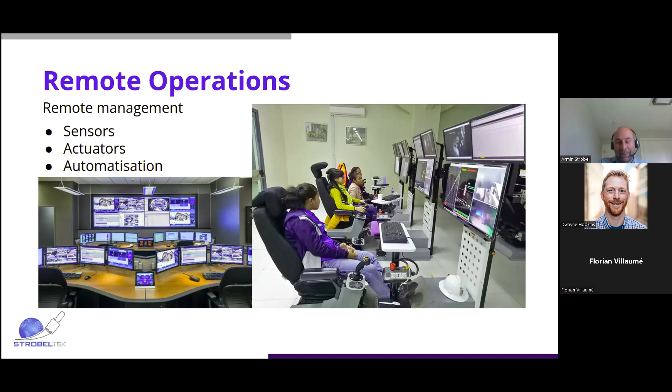So there's a wide bandwidth where you can manually control. What you see on the right or on the left side of the picture is what the remote management system could look like, where nobody's actually sitting there. They just get alerts on their phones when they need to be available.

Similarly, there are different sensors and actuators, as I was mentioning before, and there is a lot of diversity. What you're probably used to is the stationary sensors: valve position sensors, pressure sensors, temperature sensors. They're mounted, fixed at a location, and you possibly have a remote management operation center where those values are shown. And you also have, for sure, some automatization in the background, which keeps some temperatures in a certain range, and operates that.

It gets really interesting once you get sensors which are mounted on or part of mobile robots. They can be land-based robots, like what you see on top, the Spot robot walking from Boston Dynamics, or our system, or ROVs, or other autonomous underwater vehicles. The advantage of those is that they can provide sensor information from different locations, which in some cases already creates a 3D point cloud or distributed values.

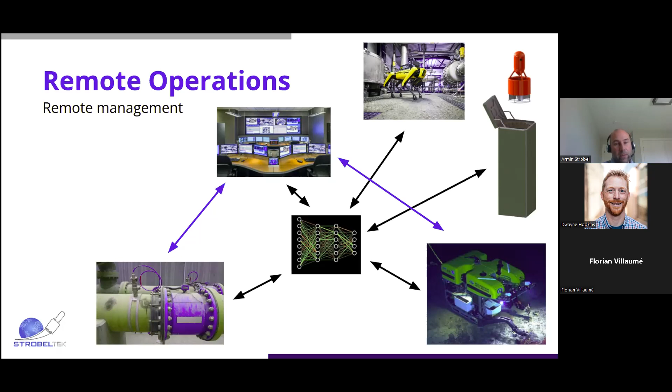And with that, in many cases, we can get a lot more information than from a sensor on a specific spot. It's similar to a camera where you get every pixel, but if you move a camera around, you can create a really complex 3D model with photogrammetry, for example, or with a laser scanner, you can also create a 3D point cloud.

So remote operations, what is the motivation behind it? Yes, I mean, we always want to improve processes, and our lives in general. And remote operations is the same thing. We're creating better awareness of the status of possibly an oil rig, or other objectives in general. I'm trying to put it into an oil rig example, but once you know better what's going on, what the status of your entity is, then you can plan much better.

That also means you possibly have less downtime, because you can coordinate maintenance actions, because you know, okay, I have to take care of those rusty spots within that time frame. While I have to shut down, I can also do other things at the same time, which you might otherwise have done sequentially. You do it at the same time because you know all that in advance,

and the whole thing also gets safer. Not just because you have fewer people, but also because you have better awareness. And fewer people means, in that case, you need to put fewer people on the oil rig, which is not just a safety advantage, it's also saving you lots of money, because those people need to be trained to be on that rig, and need to be transported.

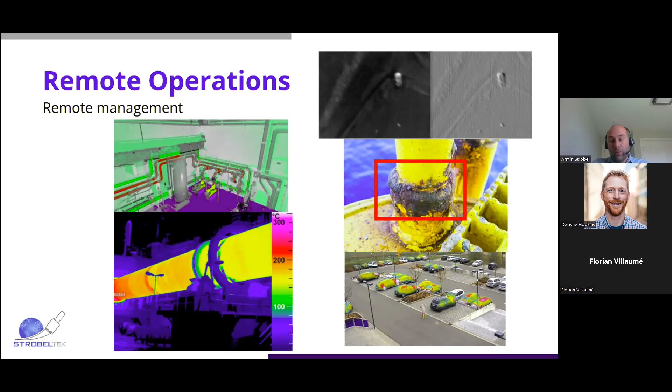And with that processing, based on the size and some other information, you can actually say, okay, that's actually a person or a car or something like this. So that information is really, yes, your remote operations is great, but that gives you the ability to have another sensor to actually integrate into your AI or your automatization to gain even much more information based on that information. So now we're getting actually into our system.

To gain that information, I mean, if you have to remotely control and send somebody onto the rig, that doesn't really make sense if you want to collect information, let's say, every day. It does make sense if you have it once a year or something like this. Then a system like ours doesn't really make sense to deploy and have installed and all that stuff. So that really depends on the example. But the cool thing is on our system, you can relatively easily collect multitudes of different data and can also monitor changes to it.

So the advantage of our system over most other drone systems is that it has a docking station, which is really compact. That's actually the most compact docking station you can get for a given weight of the drone. So the drone takes off from our docking station, surveys the area, and comes back automatically. So there's no real interaction necessary. We call that full autonomy because it does launch, execute the mission, recover itself, and replenish. Also, that part I didn't mention: it gets recharged automatically, and it has different applications for that.

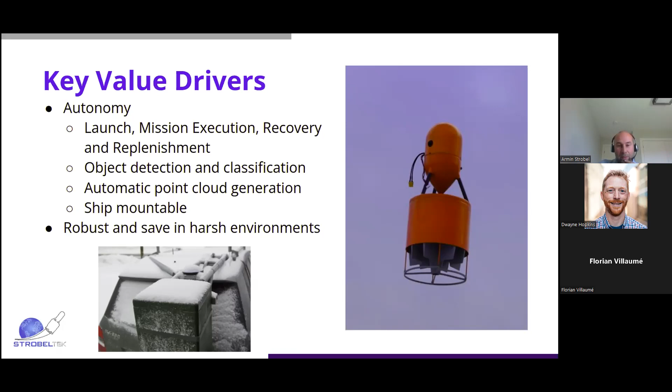And also, we have tested it really extensively here in Newfoundland. I had the whole docking station pretty much for the whole winter on the back of my car, and did multiple takeoffs and dockings from there. So I talk now a lot about the drone system, but I think the video shows you much more. We'll share a list with you of the video links so that you can have a look again at the videos, or if they're not shown properly, you can have a look at them afterwards.

So you see actually the drone took off from the docking station in the back of the car, but it can be also stationary. I think I have a video also following that stationary application. We will probably cut that short. It flies around. You see on the top left the video stream from the drone. I cut the whole thing really short intentionally. And we have also no object identification included in this. This just shows you the operations of the drone, that it automatically takes off.

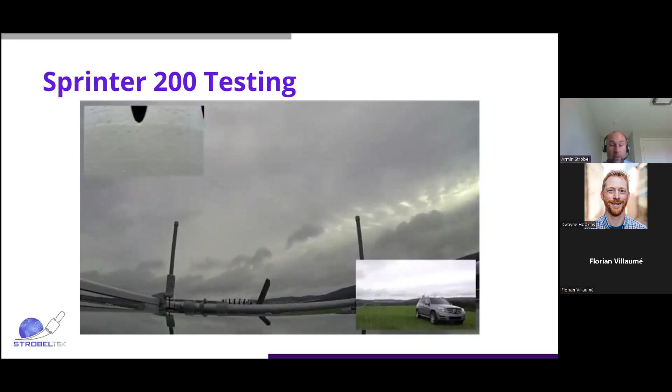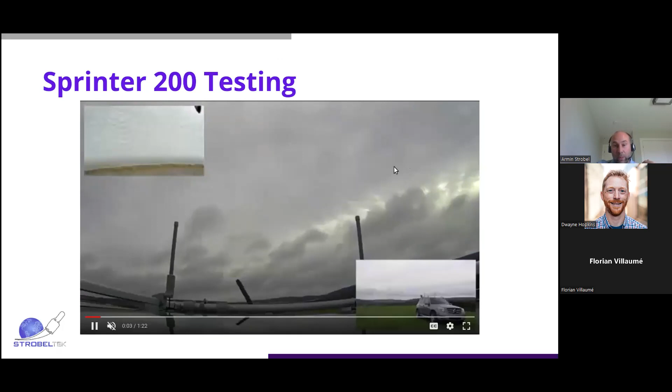When you saw me in the frame, I wasn't even in the car or controlling in any way. I just triggered the whole thing taking off, and it automatically does its mission. And what you now see is it actually lands in the docking station automatically. And again, the docking station retracts, and the drone gets already charged in that moment. And the cool thing is it's really compact, and the whole thing is really robust. So actually the lid is not opening as fast as it could, but we have the lid really powerful. So, okay.

Here is the next video. It's basically the same thing, taking off from a stationary position, so a fixed oil rig will certainly be the same thing. I'm not going to play that video to the end, but it will be in the links where you can see it.

So what I already mentioned is our Sprinter system. What we have at the moment is the 200 version. We're planning on possibly building a bigger version down the road because we have some requirements where we want to have more payload capacity to put more different sensors on board, and also possibly have a longer endurance to provide better situational awareness of things.

And so the one thing is the Sprinter UAS. That one gets bigger, and it's based on a ducted fan, which has also another advantage which I haven't mentioned. Because every rotating object is enclosed, it's very intrinsically safe. So even if you touch the drone itself, there's no threat to anybody. Yes, but you shouldn't necessarily grab with your fingers inside the duct. That's definitely not a good idea. But compared to any other drone, it's a very safe object.

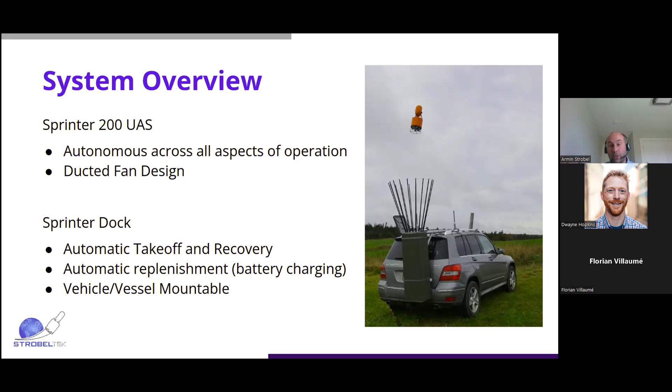Yes, and the docking station itself does take care of all the operations it needs to do. So the deployment of the drone automatically deploys the funnel to recover it, and it's really compact, which makes it suitable for lots of applications.

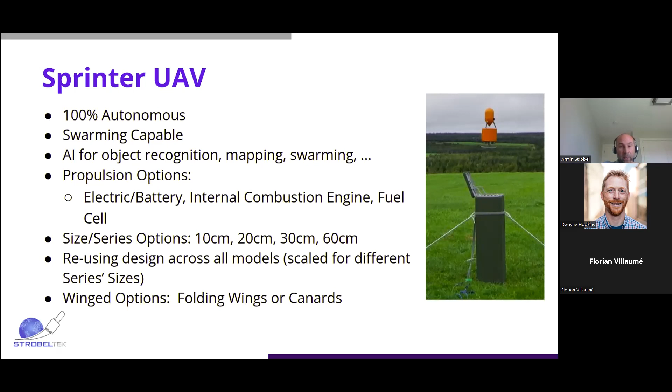I already mentioned that we have been working on different sizes of drones, though that slide is a bit older. We had some interest in making the drone even smaller, but I think in the near future we want to integrate more payload capacity and possibly a different propulsion system. We've looked into internal combustion engines, but since the technology progresses quickly, we might stay with batteries or even transfer to fuel cell propulsion, which will be really exciting.

Again, the lid opens relatively quickly, in 4 seconds. That means our drone is in the air in 4 seconds. Our drone is always on standby, so if you need a quick response in any way, we can have the drone in the air within 4 seconds.

The docking station itself is weatherproof to most extent. Certainly if you have waves washing over it, it won't handle that, but we're also looking at making it really watertight in itself.

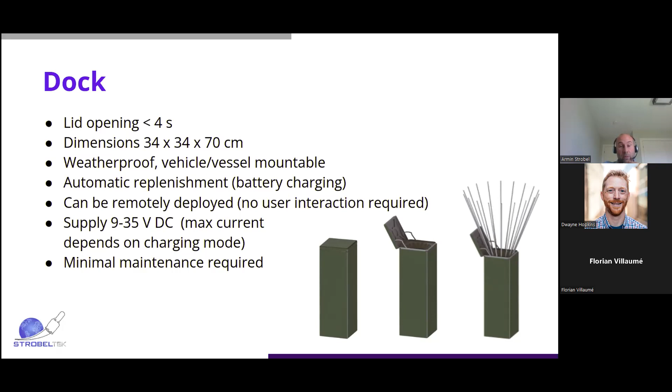There's minimal maintenance required. We kept the whole system as least complex as possible, and as far as we know, except for cleaning some contacts every now and then—maybe once or twice a year during general maintenance—we don't really need any other maintenance.

So here I'll get into a bit more depth on the whole system. What you usually see is just the drone itself and the docking station, but there's much more you don't see. We've integrated quite a few things into the docking station—for example, GPS is already integrated with a GPS antenna, so the drone always knows where the docking station is located and can come back, for mobile applications or even static ones.

You want to have a relative position that's really precise, and for that you need an additional GPS antenna on the docking station or elsewhere.

The docking station also has a computer included with multiple different interfaces. We've integrated two parts so far. One is for remote operations, so you can remotely log in from your computer—which I'm doing regularly—into the docking station computer and control the drone from there. That can be via VPN from anywhere in the world, or, what I'm doing right now, locally for offline operations with a human-machine interface, which is basically the same, just controlled locally, directly hooked up to a computer.

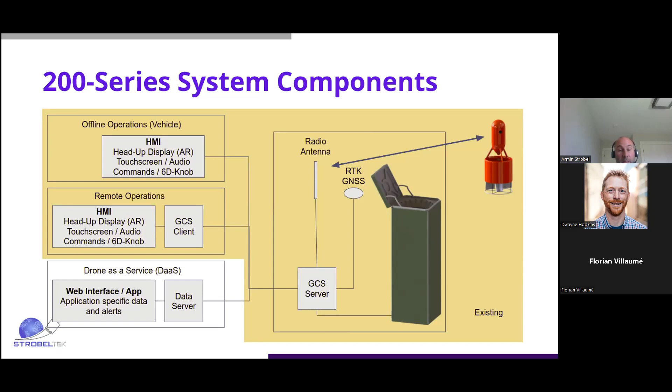What we're working towards, where remote management comes in even more, is offering drone as a service, so that the user isn't defining objectives or points of view to look at anymore—he still has a fallback to do that, but in effect he schedules some tasks in a web interface. They get completed, the data gets processed, and you get a notification via email, text, or in the app, providing you with the information you're looking for.

Just a quick history of our system—I'll go through it quickly. I've counted at some point over 25 prototypes. Here's just a fraction of them shown, giving you a timeline from 2015, where the first really crude prototype flew for the first time, to 2021 and now, where we have an even more compact docking station with more miniaturization, though it's not shown here.

In between, the drones were 100% 3D printed, which allowed us to iterate really quickly, and that's why we have so many prototypes—because we were literally able to build and test one prototype within a week, modify it the next week, and have it flying again.

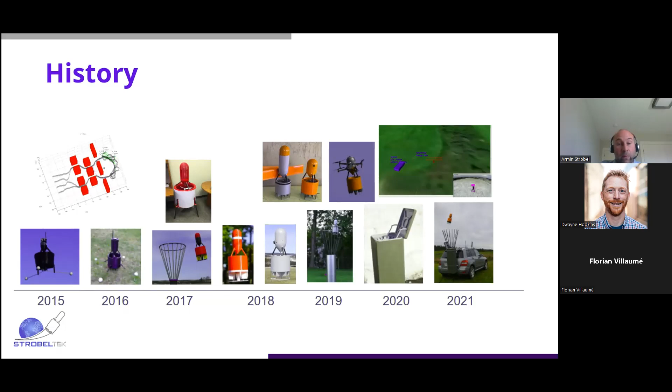So we were able to really iterate quickly and modify things which didn't work that well for the next stage. Later, we interchanged those parts where we realized, okay, they are pretty much going to stay like this with composite parts. So we even use additive manufacturing, 3D printing, and CNC machines to machine molds for those parts, and then build really extremely lightweight and strong composite parts, carbon fiber and glass fiber.

Also, we tested it quite extensively. Lots of outdoor testing, lots of indoor testing in test stands, and what we're heading towards right now is building 24/7 test stands, so that the drone can operate outside in a safe environment 24/7 to identify all the issues, the weather limitations, all that other stuff. But we have identified quite some things already.

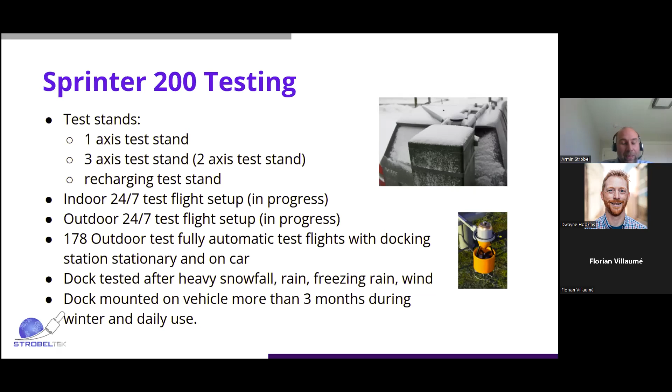For example, we have demonstrated a few times docking in gusty winds up to 50 kilometers per hour, which we are actually really proud of. Don't nail me down on that, I'm not going to sign off on that because we have done that just a few times. I would like to do that a few hundred times to actually be sure that we are fine with that.

And now this is actually why I'm talking about all that. There's lots of possible applications for oil and gas. Originally, I worked at the Autonomous Ocean Systems Laboratory (AOSL), and iceberg monitoring was one topic. That definitely our system can do. It can be not just mounted on an oil rig, it can also be on a supply ship. So we can really quickly search with that drone, without having anybody trained on the drone system, to do search for icebergs and support iceberg towing operations.

There were also some ideas from people I talked to in the oil and gas industry about weather monitoring, in that case really for the extreme short term, so that the drone takes off automatically, goes in the direction where the wind comes from, where the fog is already coming in, and you have an idea when there will be a hole in the fog, where your helicopter might be able to land while that hole is there for just a few minutes, and you can coordinate it.

Also oil spill monitoring, gas leak detection. We can also equip our system easily with different kinds of sensors. We have a little Linux computer on board where we can really easily integrate new sensors, as long as they're not too heavy. And we're working on versions of the drone system which will be even bigger.

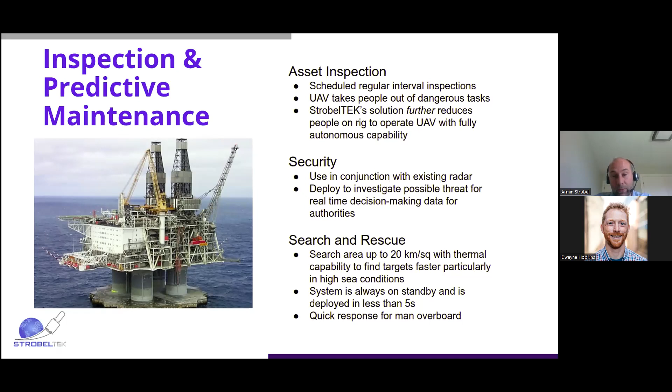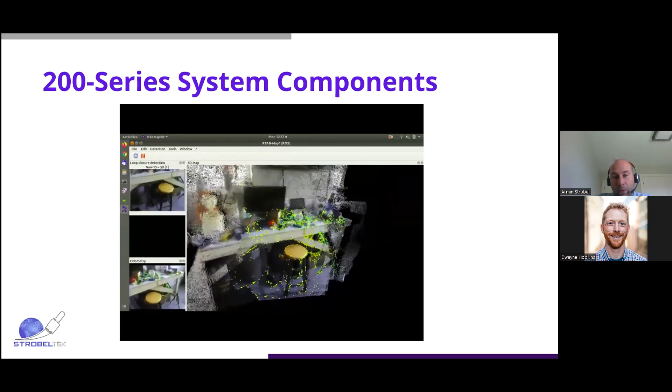So now we're getting more on the processing side. What you see here is a test with the drone. I held it in hand in the garage. We didn't fly it in that case, but we'd like to do that outside in an industrial environment, where it automatically creates a 3D model of the environment while it's moving around.

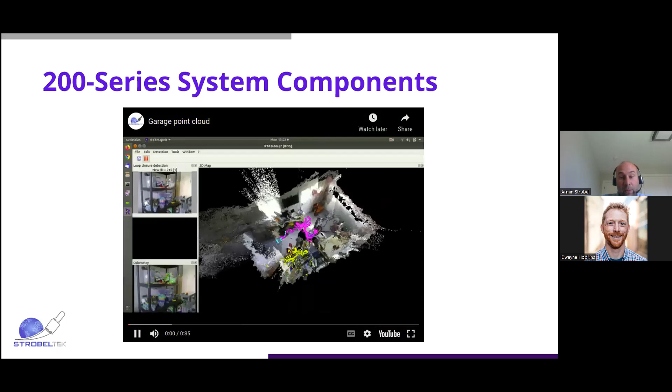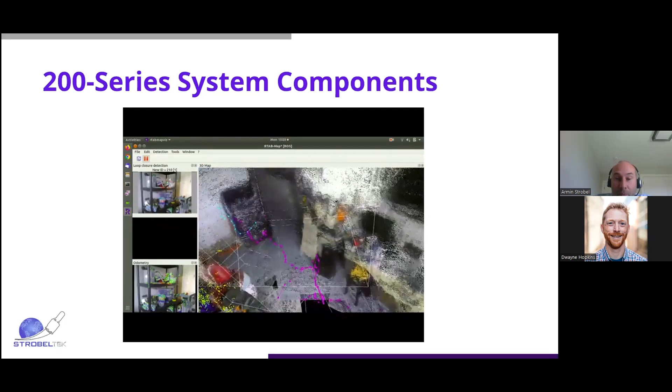That 3D model can be used to compare changes over time. That's the finished 3D model, not cleaned up, so that's right as it is. On the outside there's some things not super clean, but that's normal, because most of the time you see 3D models that are manually cleaned up. In this case, we intentionally made no modifications at all, just to show how relatively clean the whole thing is. If you're not used to that kind of 3D environment, it might look a bit off, but you can actually see things quite well.

The next thing is the manual override, which is basically what's normally the radio control you see when people stand there controlling their drone. We've modified that, and it can also be used in remote operations from anywhere in the world as long as you have the interface. We use a standard 3D mouse, which you might know from 3D CAD construction, to control the drone manually. For example, if you pull up the mouse, the drone goes up. If you push the mouse forward, the drone goes forward. If you rotate the mouse, it rotates. So it's really intuitive to use, and you don't need much training.

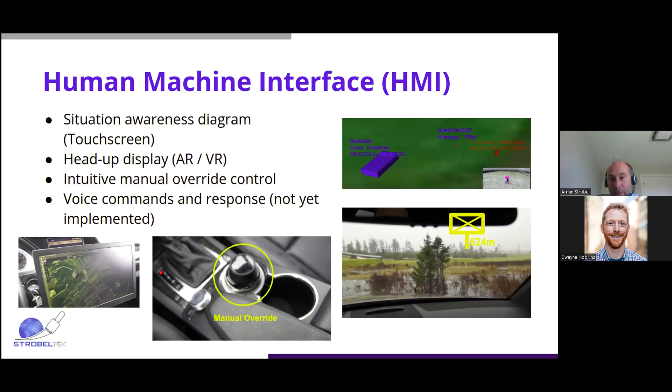On the top right, you see an image that's more for military purposes, where the drone has identified a person and put information about that person - their location and other possible identifying information - into a map and visualized it there. I mean, in this case it's a 3D map, but let's go back - here's a slide about it. What you see in the bottom video is the drone following a person and providing information about that person on the map. That's done with machine vision as well.

It's easy to do, actually. Once the person is identified as a person, their location can be estimated, because we know the location of the drone itself and we know roughly where the camera is pointing. With that, you apply some methods, integrate some filters, almost AI, and create an updated image of the situational awareness all the time. You see in the video it moves slightly, because the scale is a bit different, so it's not moving as fast as the person is actually running.

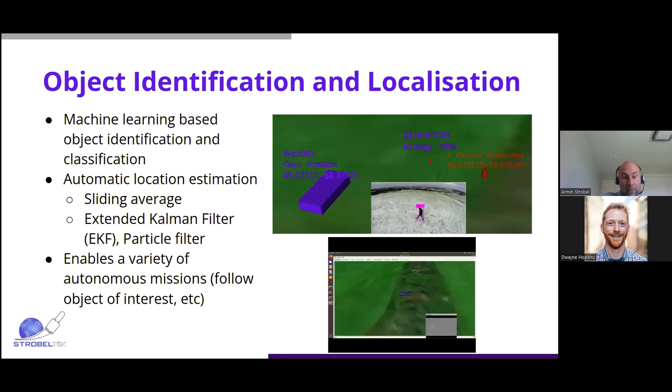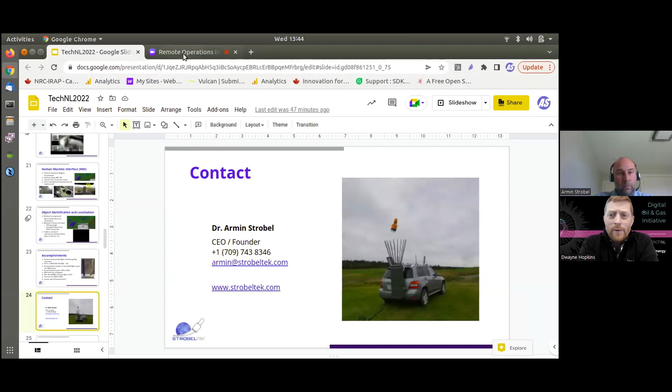Oh, thank you, Armin. This is such a delightful presentation. You said it a lot throughout the presentation: oh, this is easy to do, this is easy to do. I don't think you give enough credit to the automation and integration that you're using within your platform. I'll start it off. There was a question that came through, and I got a couple myself, but I'll start with the one from the audience. And please feel free, anybody else that is listening in, if you have questions, put them into Q&A.

So one question came from Ray Dalton, and this comes back to the oil and gas and iceberg questions. If placed on a vessel, are there limitations due to the movement of the vessel, such as pitch, yaw and roll, that may affect your launch and recovery?

Yes, there are certainly limitations. We don't know the limitations yet. We haven't really done those tests yet, but we will definitely do that. And that's one of the reasons why we're saying we will build a bigger system that will also incorporate a bigger docking station, which has the ability to some extent to compensate for that motion. And because it's bigger, it also allows some more margin for the movement. So yes, there are limitations. We don't know them, but we expect them. Everything has limitations. Even a Navy helicopter can't land on a ship all the time. So that's the fact of reality.